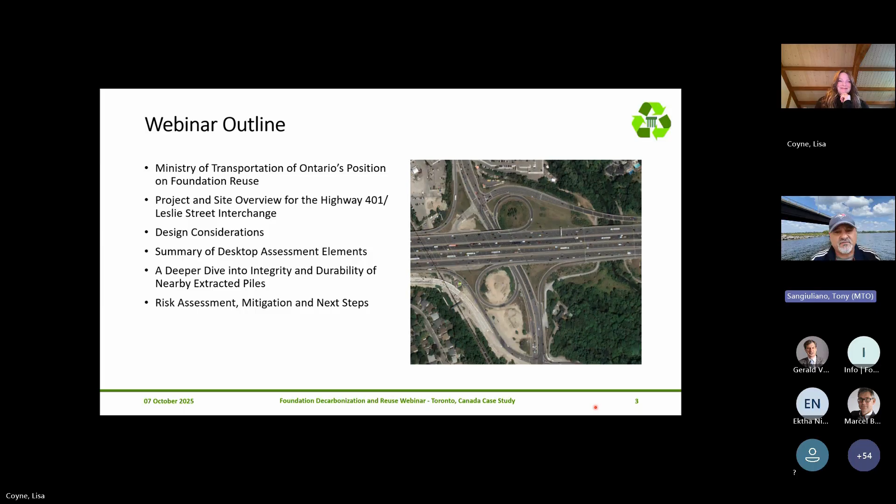I do believe what you're going to hear today is what I call a win-win situation. I always maintain that to be a winner, you've got to think like a winner. And I'd be remiss if I didn't mention, being from Toronto, with the Toronto Blue Jays playing the New York Yankees tonight, still maintaining my professionalism, that I'm going to put my Toronto Blue Jays hat on in advance of the game tonight. So with that being said, Lisa, can we go to the next slide please?

Ministry of Transportation of Ontario. This slide identifies our assets: approximately 17,000 kilometers of highways, over 3,000 bridges, 5,000 structural culverts, not to mention over 50,000 non-structural culverts. Our total asset value is about 100 billion, and each day we move about $3 billion of goods and services. On the bottom right there's a bar graph illustrating our bridges, the number of bridges and when they were built. You can see a lot of our bridges are aging, getting older, and with this we need to make fundamental decisions about what we're going to do moving forward with this bridge asset. Next slide.

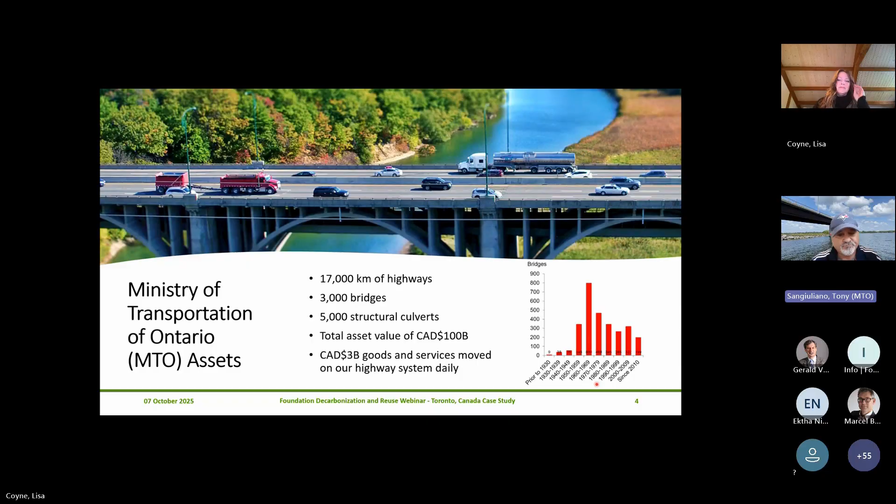So, first bullet: how do we manage the aging infrastructure? This is a challenge that we have. Do we replace the bridge? And if we replace the bridge, do we replace everything? Superstructure, substructure, foundations? Do we just invest in new bridges? These are the types of decisions that we need to make.

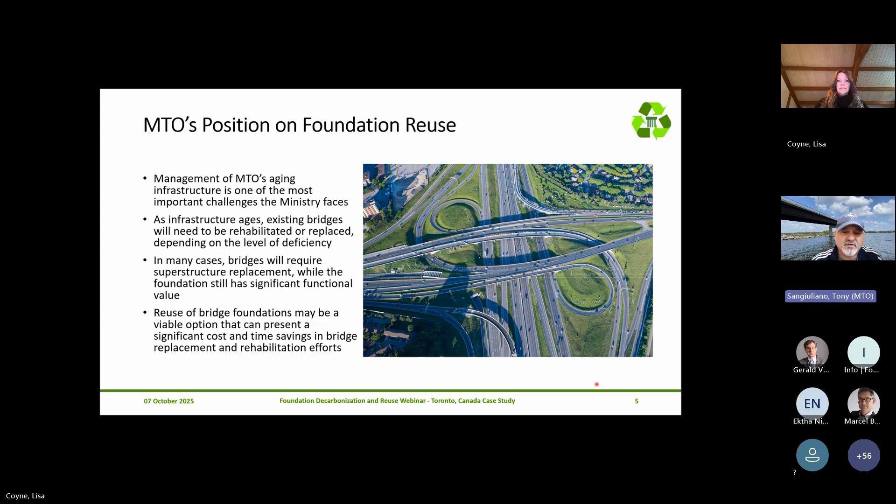But keeping within the framework of foundation reuse, of course we're looking at trying to reuse existing foundations, which I think we all know has significant value in many ways. So with this understood, and recognizing that we could save cost, time, and have environmental and sustainability advantages, we at the Ministry of Transportation of Ontario have put a lot of thought into foundation reuse.

So with this being one of our strategic priorities, we're looking at the reuse of existing foundations to be considered on every project. We're undertaking this on every job, and we've got it in our scope of work. By the way, we do outsource most of our projects to engineering service providers. So in our terms of reference and in our policy, we identified that we want reuse of existing foundations considered. We're not suggesting it's going to be the preferred option, but we want it considered and assessed on each and every job.

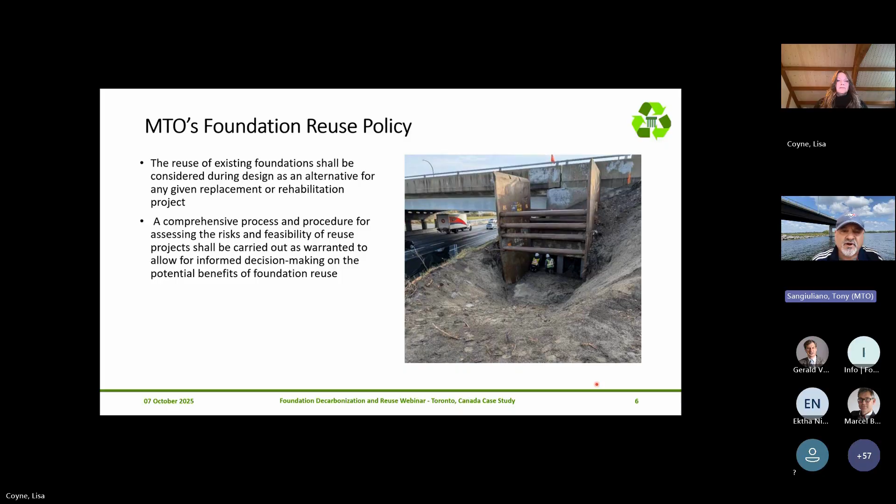So a comprehensive process and procedure for assessing the risks and feasibility of reuse of foundations on each and every project is what we're looking for as a service and deliverable, as per the requirements of our terms of reference. Next slide, Lisa.

So we do have a guideline that helps navigate us so we could make informed decisions as to whether or not we could reuse existing foundations. Included in this guideline, as indicated on this slide, we look at a preliminary assessment of capacity, integrity, and durability. We undertake a risk analysis, a life cycle cost assessment, and an estimation of remaining service life of existing foundations. And of course, we consider the environmental and social advantages.

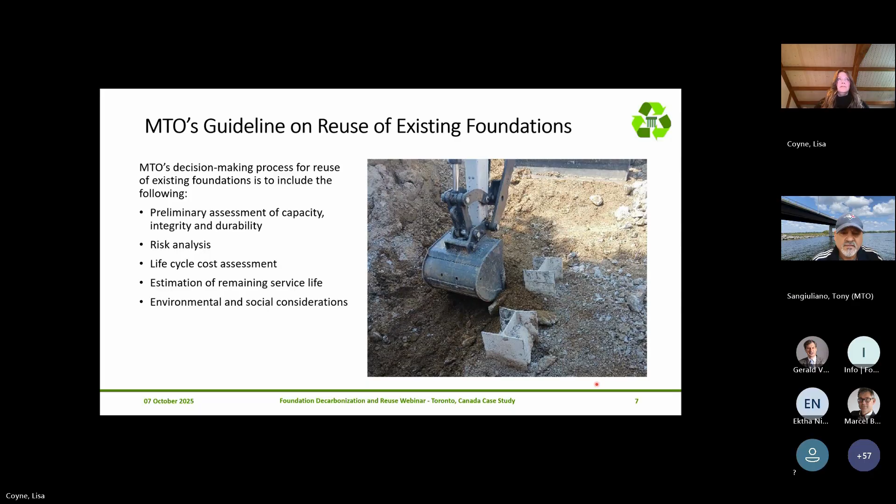Next slide. In parallel, demonstrative of our commitment to the reuse of existing foundations, we take a lot of pride at the MTO in making smart investment decisions. And as you can see by this slide, we are investing in further research above and beyond our commitment to program delivery.

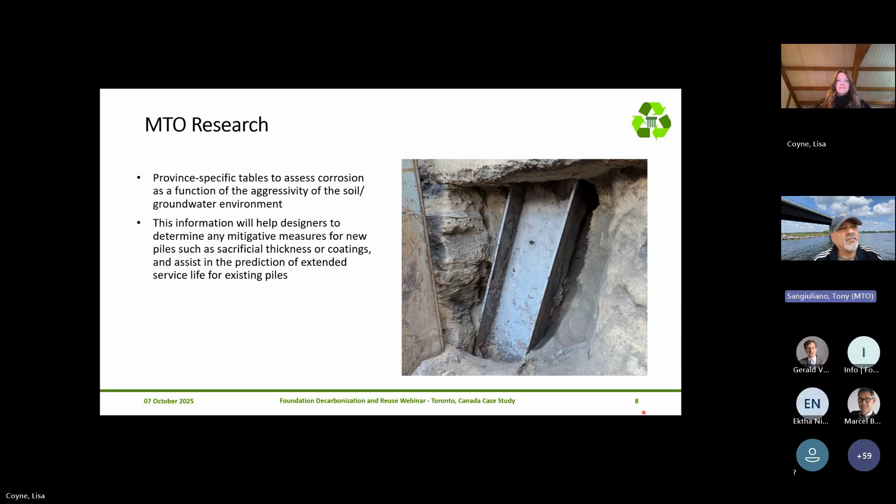So with that being said, I'm really pleased and proud to pass it over to Lisa and her team, who we've engaged, WSP being the service provider, to help us out with this particular project that she's going to share with us. Lisa? Thanks very much, Tony and Gerald, and good morning, afternoon, or evening to everyone attending.

I'm going to bring you into Toronto. I live near Toronto, and this particular project is in mid-Toronto. It's on Highway 401. Any of you in this area have probably cursed your commute at various times, as this is often ranked as the busiest highway, certainly in North America, if not the world.

500,000 cars per day. Right now at mid-Toronto, zeroing in on this site, we've got a core and collector system, or 13 or 14 lanes plus speed change lanes. So an extremely busy stretch of highway, as Tony noted in his bar histograph earlier. Lots of infrastructure that was built in the 1960s and is approaching a time when we need, at the very least, superstructure replacement.

So here's our site. This is Highway 401. In very short succession, we have a very busy rail line, a local road that is also extremely busy and has a hospital just up to the north end of the screen. And then we've got a river valley in this area, one of the 20-ish meter deep incised valleys typical in the Toronto area, right in this stretch. All of these features are within a few hundred meters of each other.

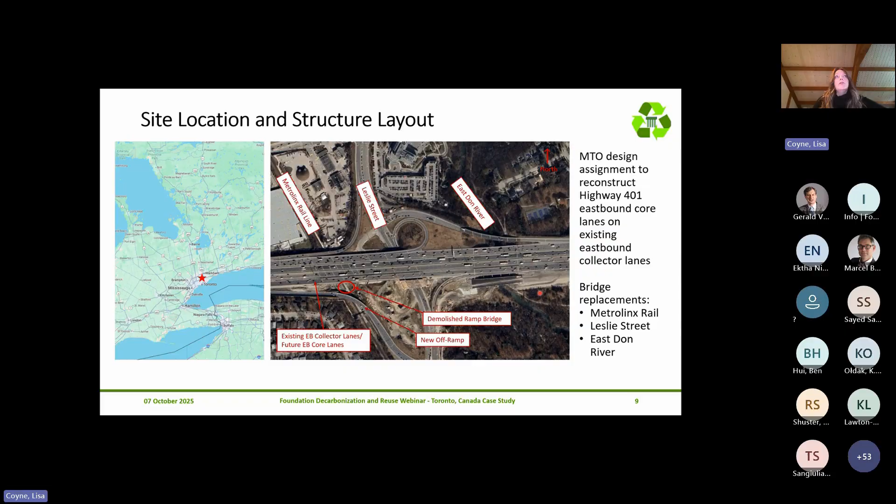Given the complexity of this area, very busy traffic, proximity to rail line, busy road, river valley, reuse, and replacement of these bridges, the potential for reuse of existing foundations per MTO's policy and guideline was of particular interest, with some real advantages here. So we're going to walk through a little bit of the background. I'm not going to go into details, since I can see I've got a bunch of geotechnical folks on this call. We're not getting deep into how we did our calculations of capacity, but trying to paint an overview picture of how we ran through the desktop study and came to our conclusions.

So this is a bit of an oblique view of the area. We have existing 16-span structures that go from west of the rail line over to east of Leslie Street. And actually below the Highway 401 deck, there has been a parking area and a rail passenger transit terminal right underneath this area.

As we go forward to replace these superstructures, this area is going to be infilled so that we have a multi-span, 3-span bridge at the rail line and a 4-span bridge over Leslie Street. I'm not going to speak to the Don River in this presentation because there's a complete change in the span layout at that location, so unfortunately we don't have an opportunity for reuse at the river valley.

But we've got these existing 16-span structures that were constructed in the 1960s. They've been rehabilitated, and the superstructures are really approaching the time where they require replacement. This is a multi-year process. We're moving the new eastbound collector now, but we've got to sequentially work through eastbound core, westbound collector.

We have an opportunity to reuse 2 piers at the rail, west side and east side, and then 3 piers - west side, center, and east side - at Leslie Street. We have not considered the abutments at either of these structure sites because we do have new span configurations in some respects, and also an intent to likely replace those with integral abutments. So we need a different deep foundation layout for those.

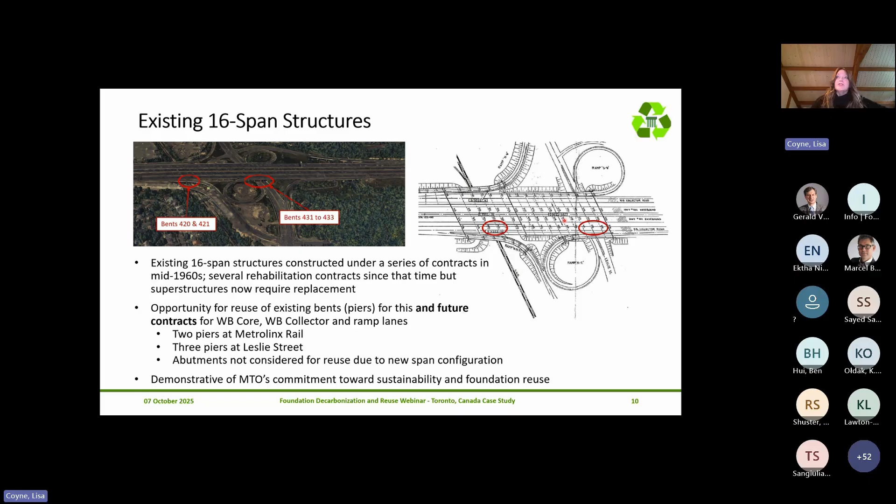These are a copy of the 1960-era design drawings, just showing the series of structures, but the bents in question. Certainly an interesting project, and one that is demonstrative of MTO's commitment to sustainability.

So moving from Tony's summary of the guideline that MTO uses, I would say there was a very comprehensive set of terms of reference set out in the request for proposal. It did require a desktop foundation assessment be completed, looking at the subsurface conditions, looking at the design that had been made in the 1960s, the past performance of the foundations for these structures, and looking at how those are geometrically compatible - can we reconstruct?

We're setting the stage for reconstruction or replacement, cascading onto the remaining structures north of these ones. So really giving some good thought to that geometric compatibility, looking at the capacity, but also integrity and durability of those foundations, looking at constructability, and moving on from that into a look at a risk register. All of this has been a predecessor to and in conjunction with the investigation work we're doing and the design that is progressing. We're in between 30 and 60% design at this point.

During the RFP, a couple of years back, an addendum came out that I was especially excited about, which really looked at the Ministry's commitment to foundation reuse. It included a ramp bridge that was demolished and reconstructed along this alignment, but the existing foundations were left in place. The superstructure was taken down, but everything from the pile caps down stayed. To get contractor access to reconstruct, they'd either need tricky burying or removal of the pile cap.

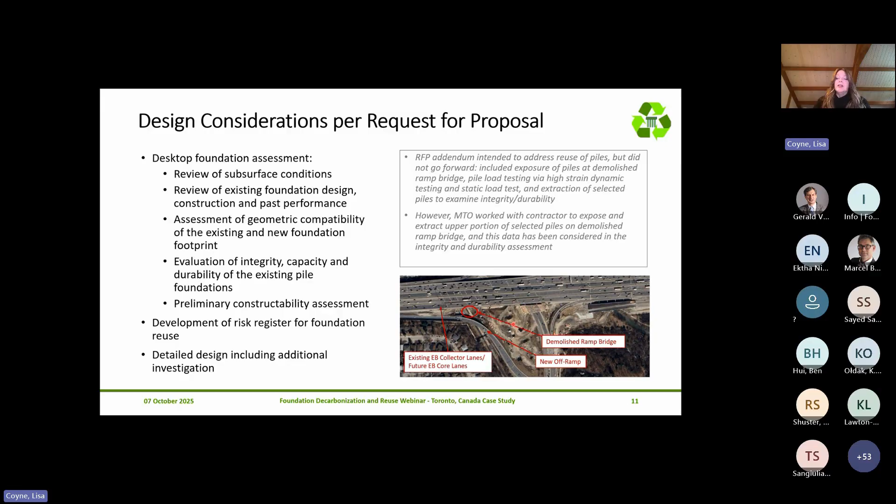But during work on the contract currently under construction for the eastbound collector lanes, the Ministry had an opportunity to have that contractor demolish the pile cap, expose the upper portion of piles, and extract some pieces for testing. So while we're largely a desktop study, we've had this wonderful opportunity to look at the condition of piles constructed in the same era in the 1960s, not quite at the bridge location in question but very near, within less than 100 meters, and let that feed into our work.

Just a quick overview of the subsurface conditions. This image shows boreholes done over phases since the 1960s. We have more than 30 boreholes in the area of the new collector and existing core alone. We haven't even shown boreholes further north for the remaining structures, which reinforce the subsurface model and give us quite a bit of confidence in those subsurface conditions.

We took a look at all of that, as well as pile load testing completed in the 1960s feeding into the original structure construction. Out of all these phases of investigation, the more recent work did include soil and groundwater chemical analysis for a suite of corrosivity parameters.

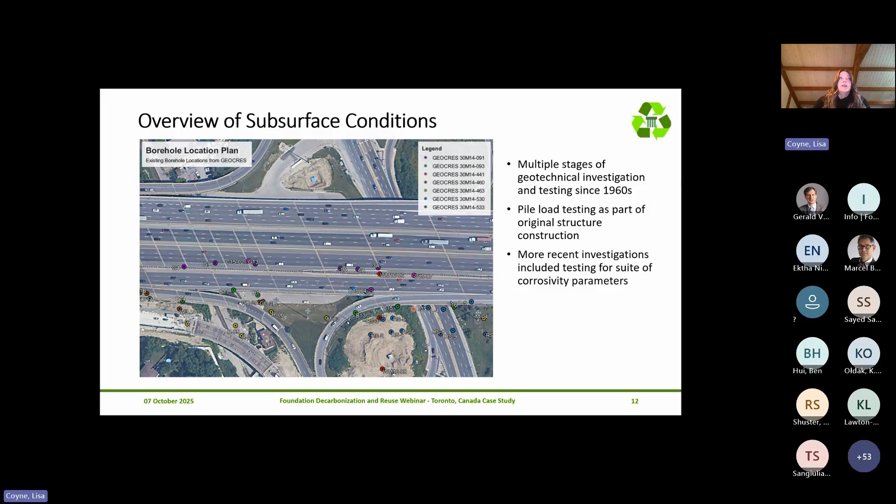Just a very quick snapshot, taken at the rail bridge. We have existing embankment fill, largely to the west. I mentioned there's a 16-span structure to the east. There's a near surface deposit of sand to silt type materials, generally loose to compact, sandy silt, silty sand. There's a shallow aquifer associated with that, a groundwater level generally within a couple of meters below either the rail grade or the Leslie Street grade.

That's underlain by a 10 to 12, sometimes even 15-meter thick layer of more compressible, firm to very stiff clayey silt to silty clay. Then down in the range of 15 to over 20 meters, depending on the bridge site, there's what we call in the vernacular here '100 blow till' - high standard penetration test N-values of this glacial till deposit - and a lower sand and bedrock that sits in the range of 30 to 35 meters below either the rail grade or the Leslie Street grade.

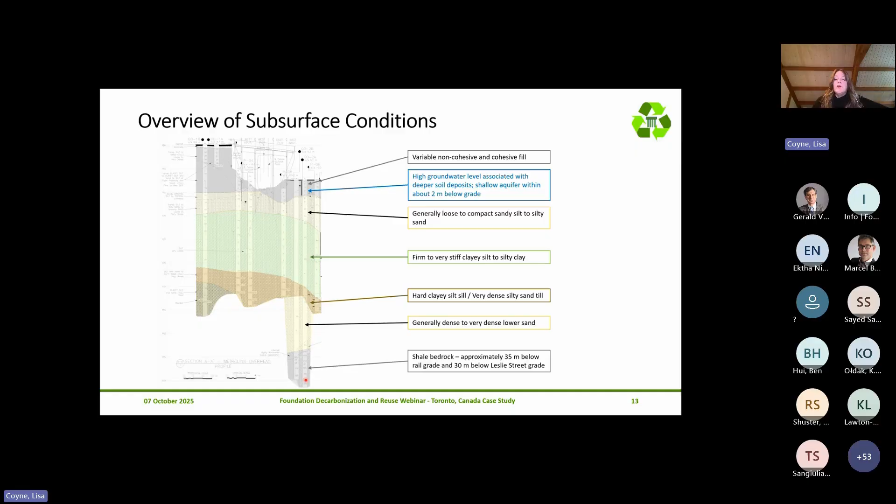When we looked at that information, I've boiled everything down into a single slide in terms of the foundations. This belies the complexity of combing through all the contract documents from the 1960s, the design drawings. Unfortunately, there are no as-built drawings or actual pile driving records in any complete sense, but we did find lots of construction notes.

Some of these bents for the 16-span structures are supported on caissons. There were some challenges with those, reflected in notes discussing pile installation. Long story short, boiled down into a single slide, we were able to work out with a degree of confidence that the particular foundation elements we're looking at are supported on steel H piles, 310 by 79, a lighter section. The numbers of piles and typical lengths we're expecting based on design drawings are between about 18 and 21 meters, ending in that 100 blow glacial till deposit. We put that picture together as part of our desktop assessment, and then moved on.

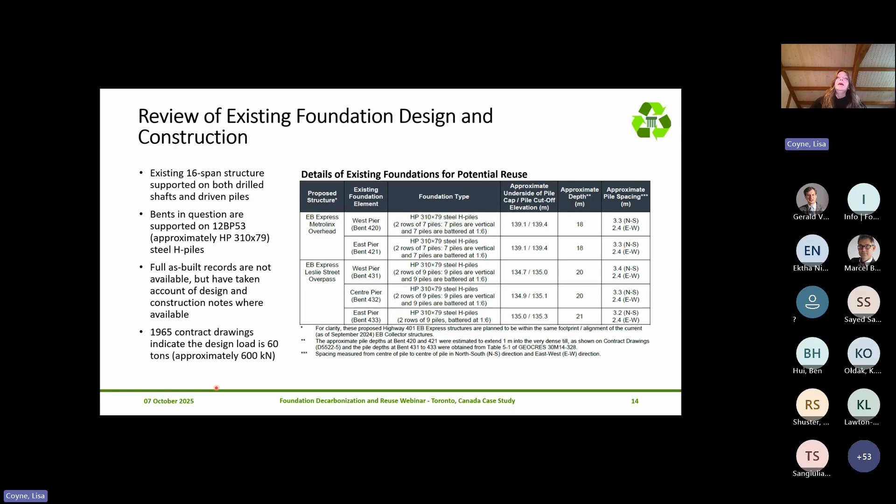There was a note, incidentally, in the 1965 contract drawings indicating a design load of 60 tons, which is just about 600 kilonewtons. Taking all that into account as context for our project, we stepped away and worked with - I see some of our structural and highways teammates on the webinar this morning - looking beyond geotechnical and subsurface conditions.

We really wanted to think about the geometric compatibility of what we were doing with these bridges, because they do set the stage. We want them ideally to tie into the new bridges being constructed to the south, but this is also setting the stage for what will happen with the bridges to the north, successively the remaining core lanes, collector lanes, and ramp bridges to the north.

So we did give thought to either maintaining the current pier locations at these bridges or completely modifying the pier locations. Within maintaining those pier locations, we've got a range of options, from reusing the existing pile foundations with no enhancement or augmentation at all, to cutting them off, removing the pile cap, and installing completely new piles. In between, there may need to be some augmentation or partial capacity contribution from these existing piles.

Those options obviously have risks that go along with them - risks and benefits we'll talk a little more about near the end of the presentation. Full reuse with no augmentation has greater risks around capacity, integrity, and durability of those foundations, but obvious benefits in terms of cost and schedule impacts. As we move toward the other end of the spectrum, those risks decrease, but costs and schedule impacts increase.

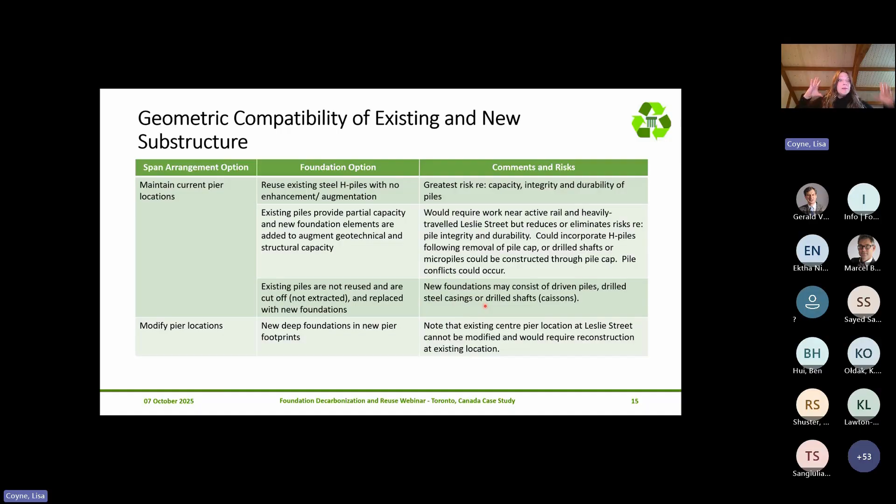Just to note that in this particular area, we have a series of oil and gas pipelines just to the west of the West Pier, and some fiber and communication lines within the rail corridor. Very typical here in Canada, but certainly some utility constraints in this area.

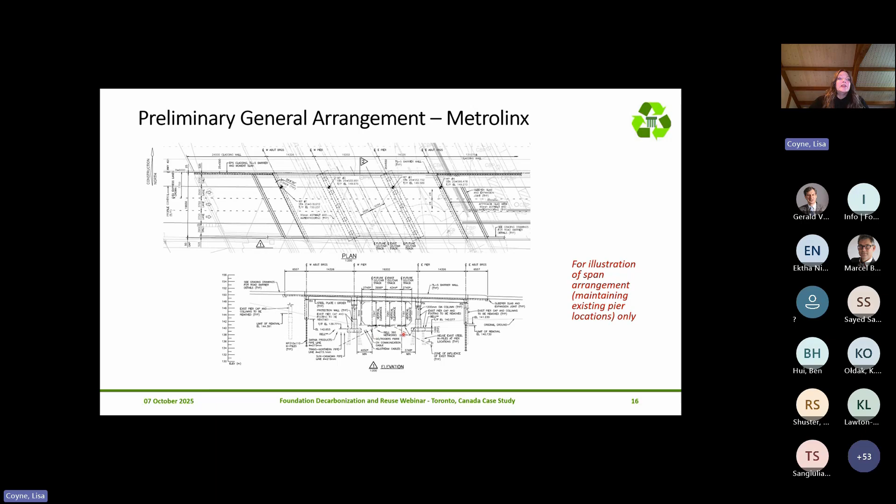At Leslie Street, again, just an illustration of that west, center, and east pier. The travel under the bridge in this area, in proximity to the hospital, is very, very tight - we don't have extra allowance of shoulder space and stuff like that. So it's a constrained bridge underneath the highway in this area, but again, those existing piers are shown here.

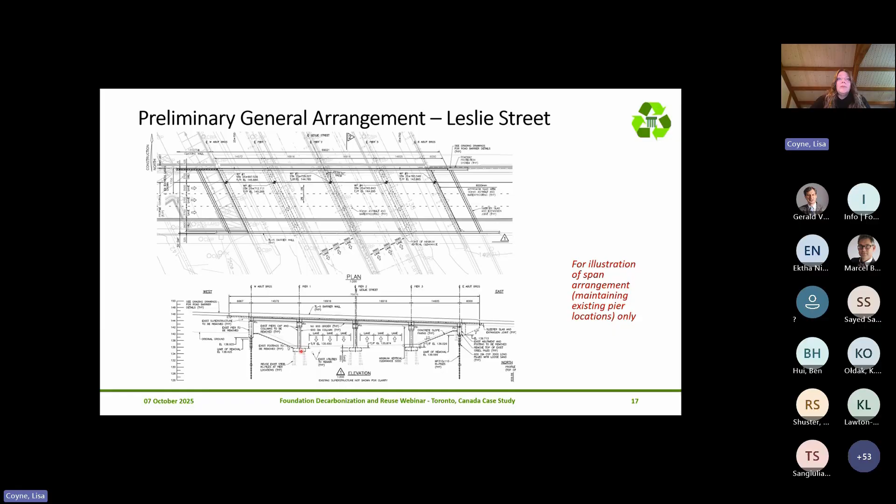So then, with the backdrop of looking at reuse of these existing foundations, working through the design drawings and all of the borehole information, we did work through an assessment of the geotechnical resistance of these existing piles. It's predicated on the design lengths and design drawings, and the original 1960s investigations showing the presence of this very dense or hard glacial till layer in the range of 18 plus meters below rail or Leslie Street grade.

From that information, we assessed capacities in the range of 1300 to 1400 factored ULS capacities for these piles, and our factored serviceability was greater than that 1400 kilonewton high end of the ULS assessment.

We also reviewed a mid-1960s load test in this area that gave us some confidence around these values. They did not test to failure - my speculation is that they were going for a lower design load and only had enough weight to test to a certain level, not reaching failure at that tested level. So we have confidence, admittedly on a different type of pile section, that they were able to achieve something greater than a factored ULS of 1300.

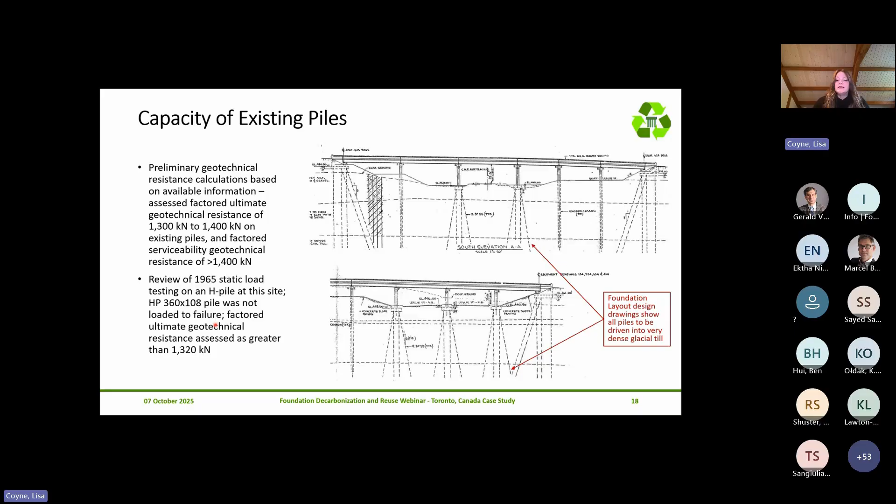We took our geotechnical capacities, and our structural engineering colleagues, some of whom are on the call here, looked at the total vertical forces acting on the piers for the existing condition and for a likely future superstructure condition. The conclusion was that we would have more than sufficient axial geotechnical resistance on these existing piles based on our assessed capacities for the proposed superstructure loading with those replacements.

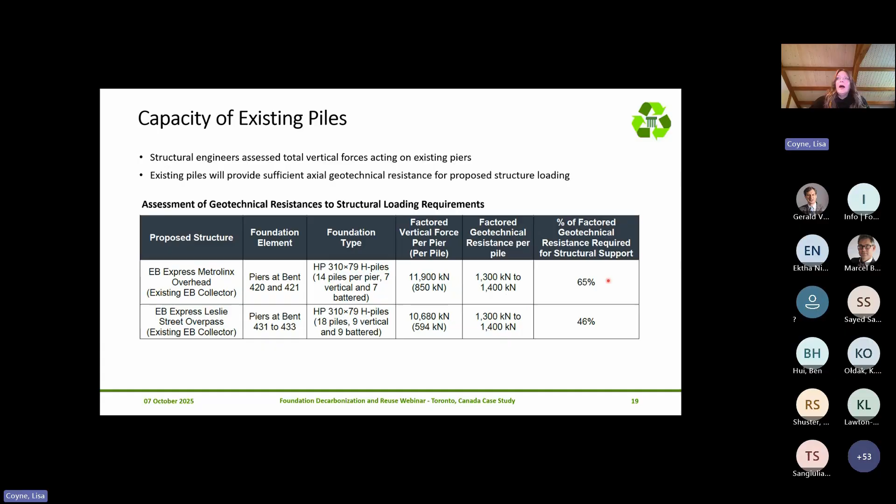You can see the percent use of the factored axial geotechnical resistance for structural support. Not going into the details of bending moments and other aspects here - that was not as deep a consideration as part of the desktop phase, and will certainly be a component of the detailed design as we move forward.

I'm going to turn things over to Riley now to move on to the more integrity and durability aspects of the pile assessment.

So my focus today will be on the corrosion assessment work and analysis completed in support of this project. To date, there have been 3 studies completed over the last 9 years, with the most recent being completed in 2023. Estimating corrosion losses is quite a complicated topic, so I'm not going to get too deep into the methodologies today, but I will talk about the type of criteria used on this project.

In this case, there were 2 design guidelines: the first being the MTO gravity pipe design guidelines, and the second being the Caltrans corrosion guidelines. A lot of these guidelines are based on empirical correlations developed over many years of experience, but from studies completed back in the 1960s. So there's always opportunities to improve, and we're always interested in seeing these sorts of projects.

I'm quite excited by this work. Generally the findings from these testing programs completed on this project have suggested soils with corrosivity ranging anywhere from non-corrosive to severe corrosiveness. Quite a wide range, and these guidelines are typically qualitative in nature. They provide a ranking and then prescribe values to use for corrosion allowance.

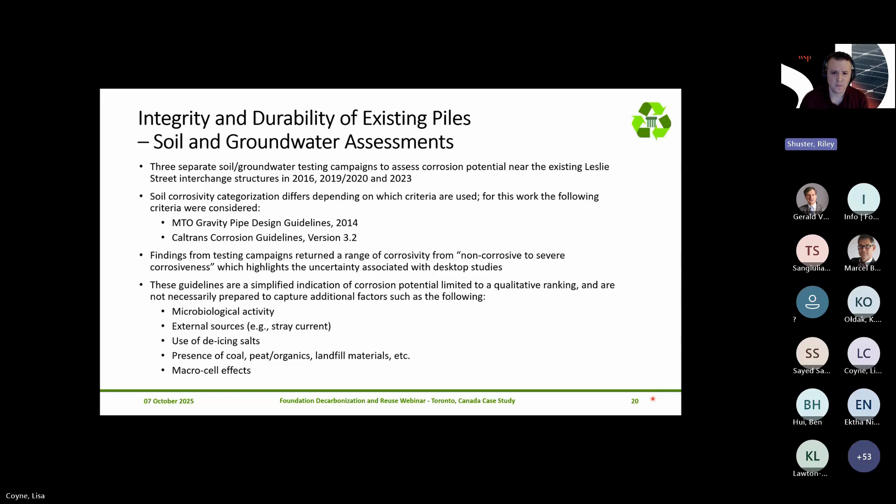There are additional factors that are not always captured, things like microbiological activity, stray currents, use of de-icing salt that may change the characteristics of the soil over time, presence of organic material, or macro-cell effects from different soil layers or groundwater conditions. So generally just trying to highlight some of the challenges that might be associated with relying solely on a desktop type study.

As Lisa's highlighted, on this project there was demolition of a former ramp bridge, which had similar service life as the structure that we're trying to reuse, providing an opportunity to extract pile segments. Those pile segments shown here were subject to visual examination both before and after they'd been cleaned, and then ultrasonic thickness measurements were collected by a specialist corrosion testing firm to provide an opportunity for site-specific data.

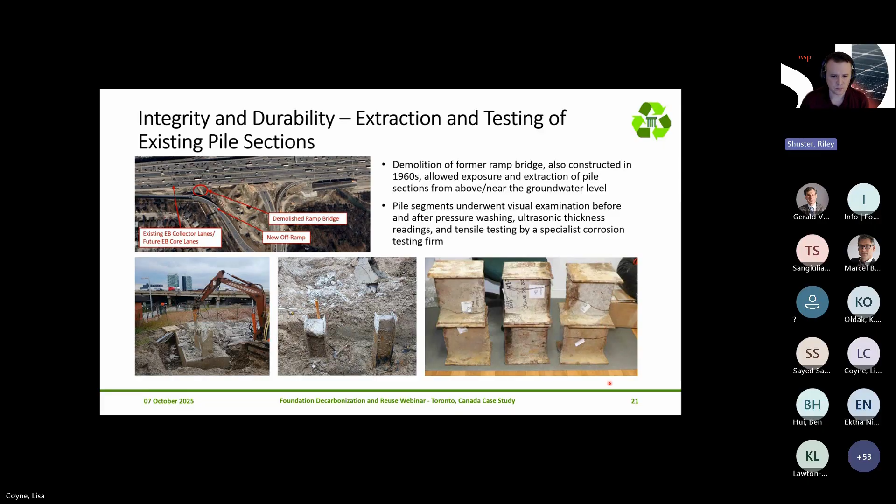Next slide, please. Just to summarize that work, completed by another firm, as part of the demolishment they were provided with an opportunity to make direct measurements of the extracted piles, which is a really, really valuable piece of information to have. Alongside that, laboratory testing was completed, and based on those guidelines I talked about a second ago, the suggestion was that the soils would range from anywhere from non-corrosive to slightly corrosive.

The report notes evidence of a former corrosion protection barrier coating described as having long since failed, and would have been consistent with bitumastic coatings that were prevalent during that time of construction. The majority of piles showed evidence of corrosion at 2 different elevations, consistent with seasonal variation in groundwater. As the groundwater fluctuates, the most active area of corrosion shifts in and around that groundwater level. There was also some evidence of pitting corrosion, consistent with areas where the coating may have failed first, exposing the steel.

Overall, the extracted samples were described as being in generally good shape, and the maximum section loss reading, individual reading that was measured, was 18% after 59 years of service.

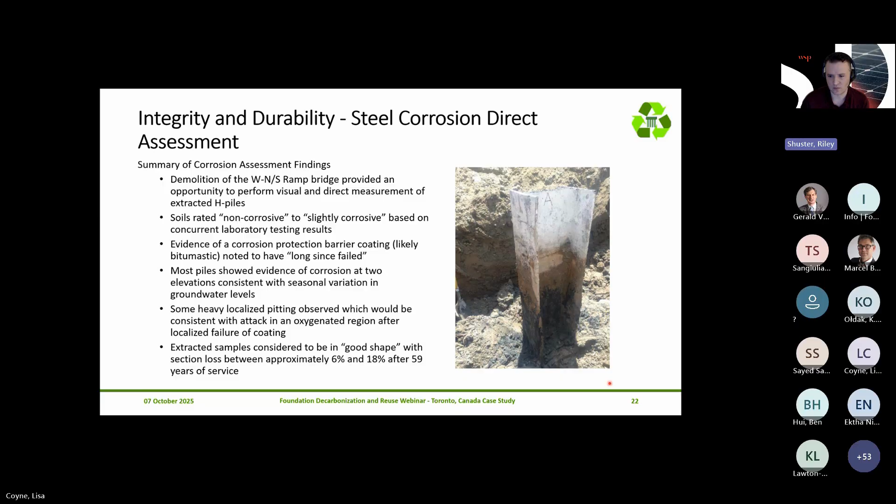Next slide, please. So based on this testing, the specialist firm calculated some rates of corrosion for that 60-year service life, and their report suggested anywhere from 0.93 to 2.69 mils per year. It's thousandths of an inch.

And it appears that in developing these rates, they used the highest reading, so from that perspective this would represent an upper bound, or the most conservative reading of that information. There's also some suggestion that since the coating had failed, they might expect the rates to increase anywhere between 1.3 and 4.6 mils per year. And to put that into context, that highest value is roughly 3 times the value prescribed by Caltrans for these soils.

So when you start to get into those sorts of numbers, making the case for pile reuse is quite difficult. They provided a forecast suggesting that after 30 to 40 additional years of service the piles would reach 50% section loss, and provided 2 options for corrosion protection measures: excavation and reinstatement of the barrier coating, and/or installation of cathodic protection, both of which would be quite costly and might get in the way of reusing the piles.

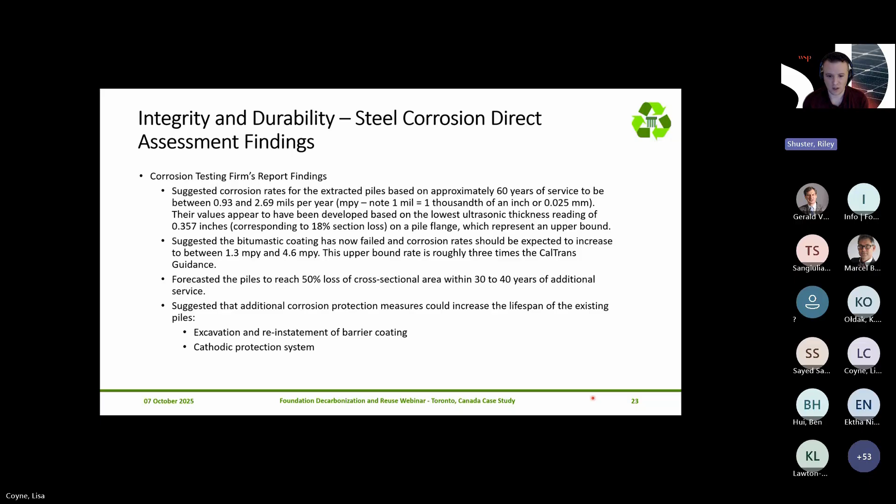In our experience, these ultrasonic thickness measurements are most applicable to assess the general corrosion rate for driven piles, as opposed to pitting corrosion rate, and we'll get into that in a second on the next slide. Here we've shown the data with a normal distribution and a standard deviation of about 9 thousandths of an inch.

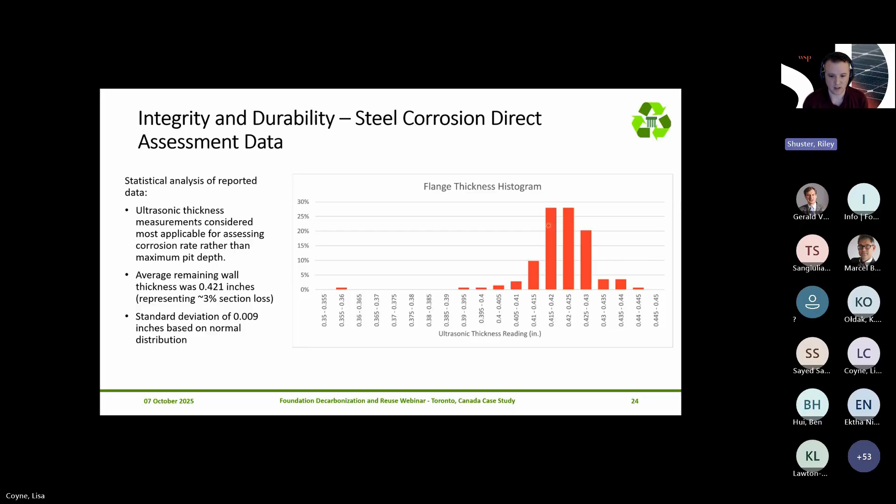So for our purposes, specifically with driven piles that are not subject to the same constraints as something like a pipe that might carry fluid, we would consider the development of corrosion rates based on an outlier value to be quite conservative. Instead we would focus on the 95% confidence value for the data set, which refers to the point within 2 standard deviations. On this project, that amounts to approximately 7% section loss, a pretty significant reduction over the pitting value we saw previously.

So we developed our upper bound corrosion rate recommendation based on the original pile thickness shown here, 30 years of service life of the original barrier coating, and a total of 59 years of service from pile installation to extraction. We get a value that's approximately 1.08 mils per year.

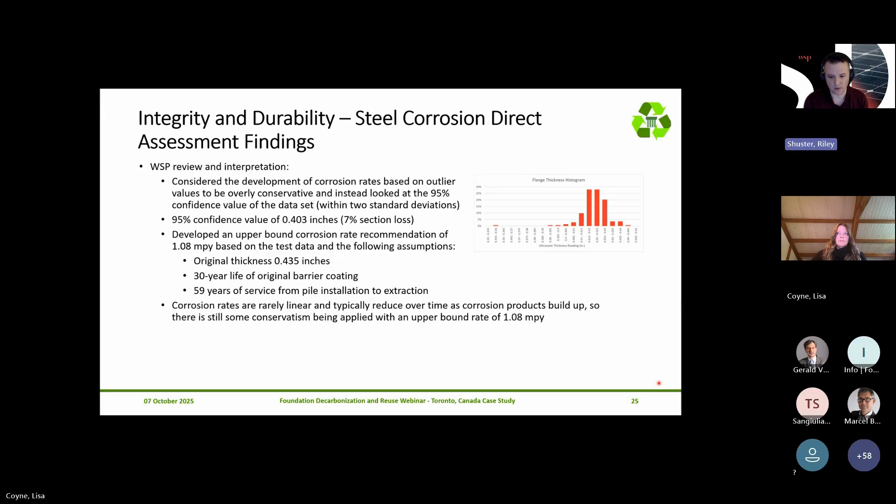Based on our experience and review of literature, we would not expect the corrosion rates to be linear—they typically reduce over time as corrosion products build up at the boundary. So by specifying a linear rate here, we still do have some conservatism, but our approach is more in line with the expected values from the Caltrans guidelines.

Back to you, Lisa. Thanks very much, Riley. So from the desktop assessment process, complemented with this cool opportunity to look at an admittedly small sample set of extracted piles from a structure in near proximity to the bridges in question, we have made a preliminary conclusion that the existing pier piles will provide sufficient geotechnical resistance for structural loading conditions.

There's a risk there around the pile length and capacity, but I'll come to that risk assessment in a moment. From what Riley has explained, we also concluded that the limited corrosion observed on these extracted piles supports a corrosion rate that would allow a remaining service life of 75 years for the design of the superstructure replacement with foundation reuse on these piers. So this initial desktop process and assessment concluded that reuse of the existing piles is feasible.

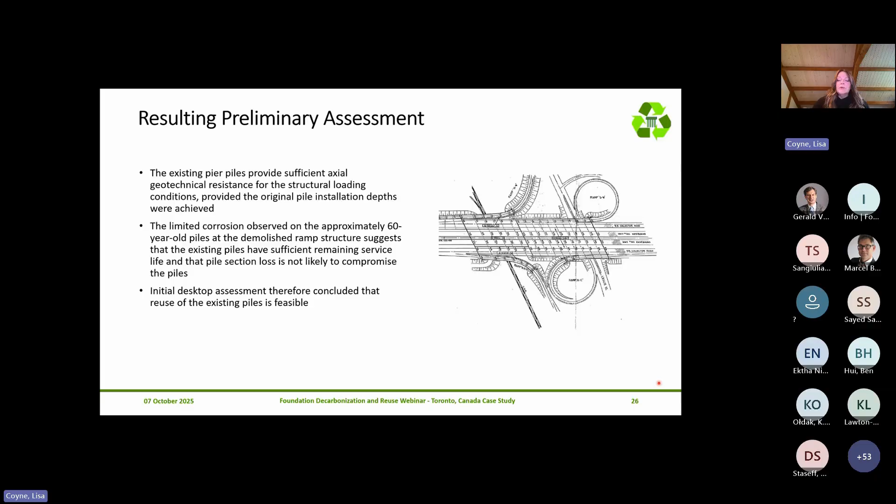It ranged from physical things like the pile length and tip elevation, which feed into pile capacity. Was the pile size shown on the design drawings and discussed in some notes the right pile size? It's unlikely to be a lighter pile section, but nonetheless a check on that. Spacing, batter, pile cutoff elevation are probably less critical in terms of capacity assessment, but have an impact on reinforcing steel details for replacement of the pile caps. And then moving on into the extent of corrosion and the corrosion rate and high localized corrosion beyond that general rate, potential for continuing degradation, and impacts on nearby utilities.

Remember those pipelines running down the west side of the rail structure. As part of our thinking around construction, we considered working near an active rail line, working near a very busy highway and local road, and the constrained construction access and space. All of this is also associated with a river valley, and between railroad and river valley, it makes for quite difficult access for heavy foundation construction equipment, bundled up with schedule and cost.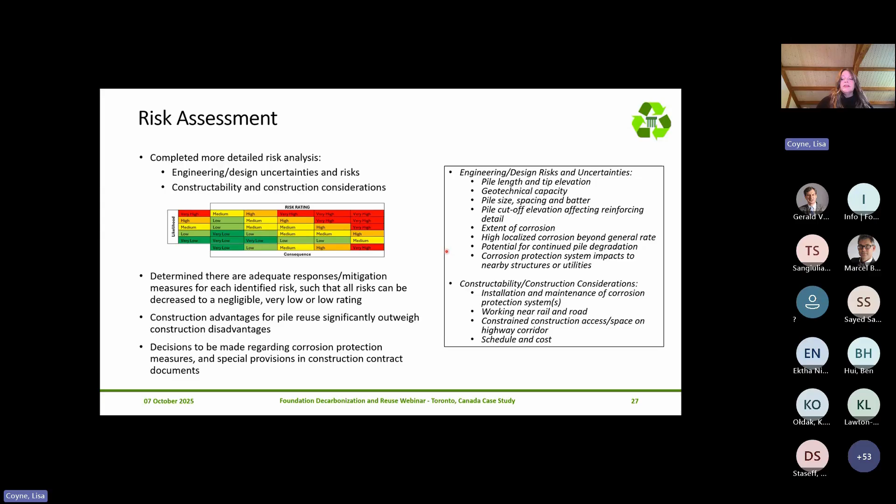The advantages for reusing these piles, in our view, significantly outweigh the disadvantages for their reuse. We do still have some decisions to make around things like corrosion protection and some actions in construction around risk mitigation, which I've summarized here.

So, no performance issues on these piles. The capacity is adequate. We have some uncertainties. Some of you on this call, I saw some of our friends from Thurber joining, and they've done some great work, as have our geophysicists, around downhole geophysics to try to pick up and confirm pile lengths, as that can feed into confirmation of some assumptions in assessing pile capacity.

In our case, between pipelines, fiber lines, rail lines, overhead structure, and being underneath an existing highway deck with limited headroom and busy roadways, it's almost impossible to get a drill rig close enough to these existing pile caps to drill and run downhole geophysics to pick up the pile length. We haven't completely given up that hope, but it's pretty unlikely.

So that's an unknown. As mentioned, and as Riley's mentioned, about these extraction tests, it's a great sample set, but still limited data, and it's not directly at the existing pile location. So there's some potential for additional testing that we may be able to do as our investigation design proceeds.

What we're looking at as we move toward design and construction is, number one, implementing a corrosion protection system for these existing foundations as well as new foundations. That's still to be considered as our detailed design moves forward, as well as a special provision to incorporate into the specifications for this project.

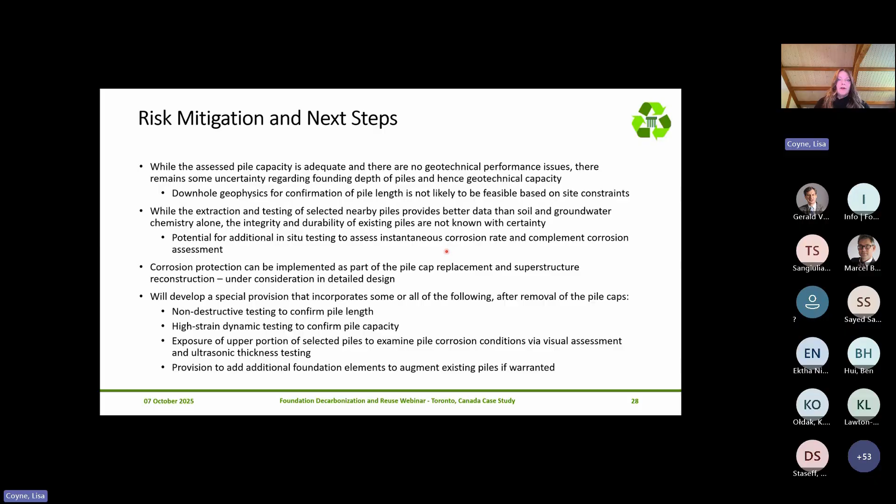I want to acknowledge a couple of firms and a number of individuals who've contributed quite a lot to the work we've been doing as part of this project. Brennan Paving, the firm currently working on the adjacent contract, undertook these extractions, and Glencore did all of this testing. Minkyong and Neem at the Ministry of Transportation, and my colleagues Anna and Will, our senior geotech and senior materials engineers within WSP, and of course our structural and highway engineering colleagues here.

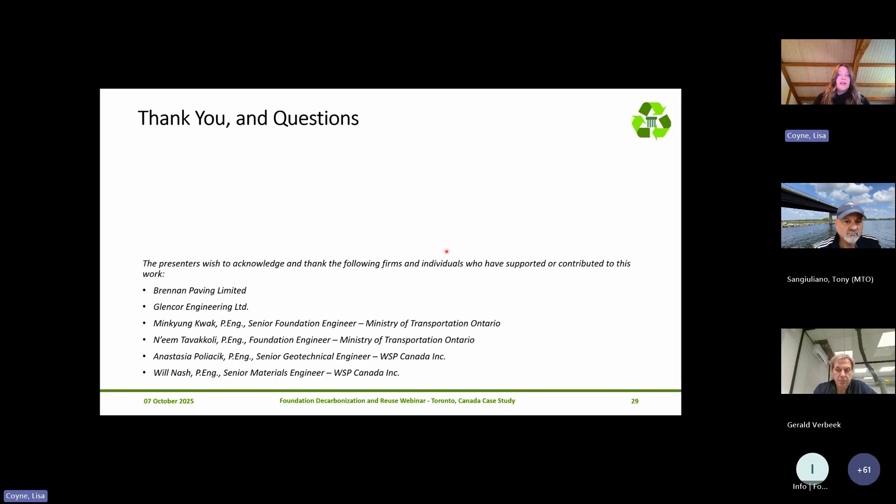But really, ultimately, thanks to the Ministry of Transportation and Tony, for your enthusiasm towards expanding the body of knowledge around deep foundation performance over time, and the integrity and durability of these foundations. Really an excellent case study, and pleased to see the number of these that have developed so far, and looking forward to more of them, certainly.

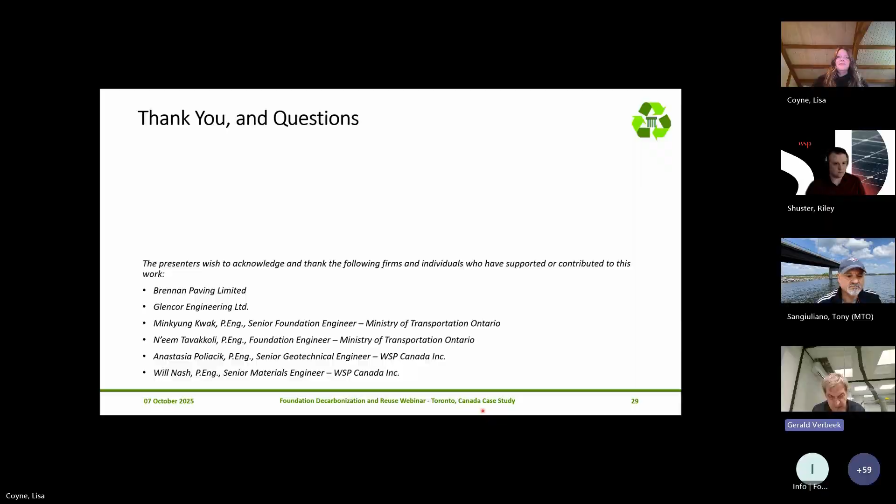Tony, first question is for you. In one of your earlier slides, you indicated that reuse shall be considered as an alternative. Does that mean if a bid comes in where the contractor does not consider reuse, the bid is not accepted or is rejected? How strong should we read that 'shall be considered as an alternative'?

The reference to considering alternatives, Gerald, was more directed to the engineering and design. But we could separate the engineering design from the construction. From an engineering design perspective, what we're asking our service providers, as I indicated in my presentation, is to take a look at the feasibility and viability of reuse of existing foundations on every job. We'll make that assessment and determine the feasibility.

If it becomes an option during construction where a contractor looks at all the information and says, 'Ministry of Transportation, have you considered the reuse of existing foundations on this particular job?' Such a consideration can always be submitted via a change proposal. But the history of change proposals administered at the MTO is such that if it comes to a scope that's extremely large, requiring a lot of redesign and so on, I think the likelihood of that being accepted would be slim, even though we would consider it. That's why we'd prefer to put more effort into the engineering and design perspective and have the consideration done at that time.